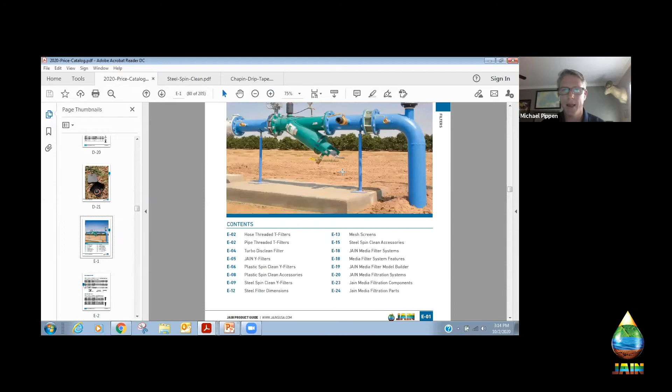So maybe I know what I want to look for, so I'll scroll down a little bit. Or maybe I don't, and I'm just going to jump to a section here. I can jump to media filters, I can scroll from there. Or maybe I want to go to the steel filter, so you can scroll to there.

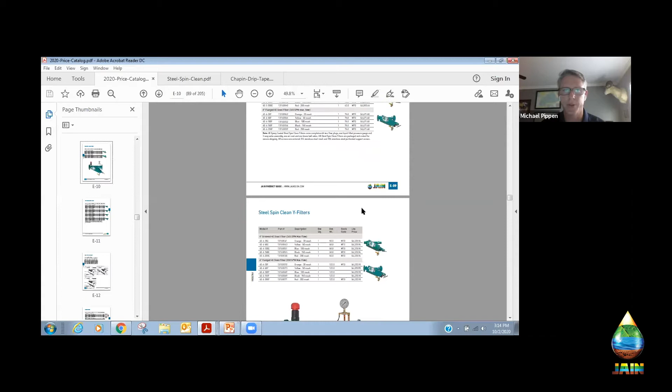The reason I like this bookmark feature is that you kind of get lost in a big catalog, right? The scrolling - where am I at? Am I at the front part of the filters or the back part of filters? With a page thumbnail, all you ever have to do to kind of get back to zero is scroll all the way up, click back on the table of contents.

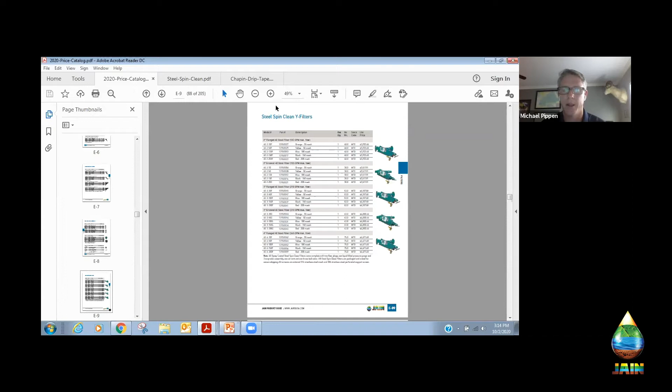You go, okay, I was in media filters, I really wanted to go to steel filters - I click right there, and that's how I get there. So instead of this endless scroll up, scroll back, you just really easily go back, bring you back down to zero, back to ground level, back to the table of contents, and move through the catalog very quickly that way. So that's a unique feature - you can move to the individual pieces of the catalog products, the product group, and then back and forth throughout the catalog.

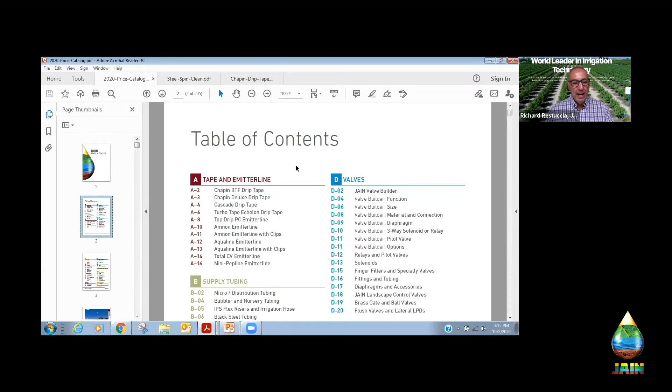Yeah, that's so valuable. I've spent so much time on other people's documents, turning pages, clicking the button, listening to the page turn - it's driven me crazy, right? So this solves it. And if I want to look at an emitter line, I can look at that. I can go back, go to fittings, whatever. Right, and everybody kind of has their level of expertise, or what kind of software.

Really, a lot when it comes to PDF - do you have the full version or the free version? There are some different features you may be able to add with different versions of a PDF editor, but this is basic. This is what you get for free, so there's no tools here that you're not going to get. If you're wondering does my software do that - yes, this is right out of the box. There's nothing special here you have to have.

And so as you start figuring out what sections you want to look at and what content is in those sections, I believe a lot of people may understand - let's say we're working with an ag dealer, or maybe even an end user, and they say, I know I need a drip tape, maybe I even know I want a certain flow rate or a certain spacing. But what does Jain offer, right? What is actually out there, and can I even specify what I'd actually want to do?

As a designer, you can design something that there's no product that actually would solve that solution. So as you become more familiar with what products are offered as a designer, that's really, really valuable—knowing how to design towards a solution that's available in the market today.

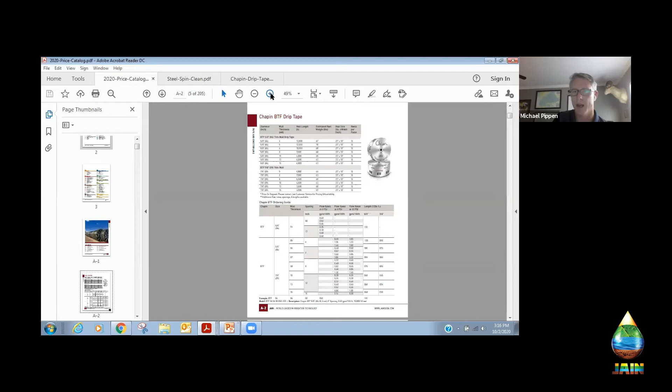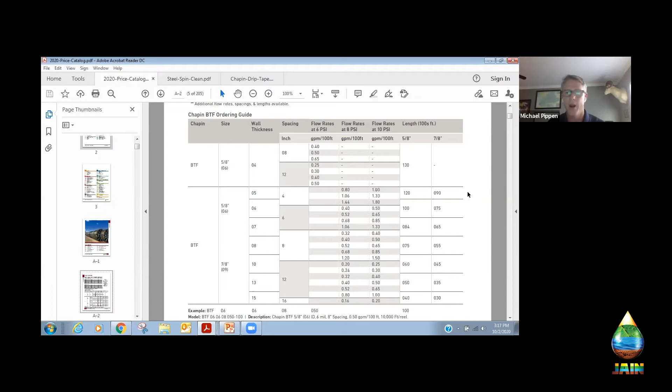So let's say, for example, we want to jump into our Chapin product. I can click right on this and it brings me directly to the BTF product line, the Chapin Drip Tape BTF. So what is available from us? It has some specifications here, but really where we put a lot of time and effort in this catalog is in product selection, because there are a lot of options out there. It's not necessarily a bad thing, but how do you get through a catalog this big with this many product offerings and get to the selection you wanted?

You'll see this format here that we're going to present throughout the catalog. It's very intentional that our selection guides are very similar in the way they're done, so you only have to learn one way to do this. You'll see some variation depending on the product line, but a similar flow across the chart, left to right.

So you're asking, okay, what does Jain offer here? They offer a BTF Chapin in a 5/8 or 7/8 product line. In that 5/8 or 7/8, we have these different wall thicknesses: 5, 6, 7, 8, 10, 13, 15. Within those wall thicknesses, we have these current spacings: 4, 6, 8, 12, and 16. And within those spacings, we have these flow rates, listed at both 10 PSI and 8 PSI—whichever one you like to work with. Some manufacturers use 8, some use 10; we have them both in here for that exact reason.

And then you get coil lengths based on the size—the 5/8 and 7/8 product do have different coil lengths. So for example, if you knew you needed a 5/8, 8 mil product, and you're kind of bouncing around your flow rates—maybe 8, maybe 12—what am I looking at? You can go, okay, in 5/8, 8 mil, 8 and 12 inch, here are my options. If I want a 0.40, I've got an 8-inch 40, I've got a 12-inch 40. You might even look up here and say, oh, do I have a 6? No, I don't have a 6-inch 40—I only have a 50 here.

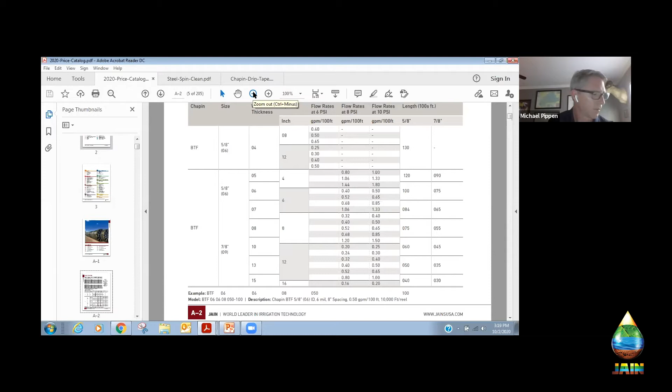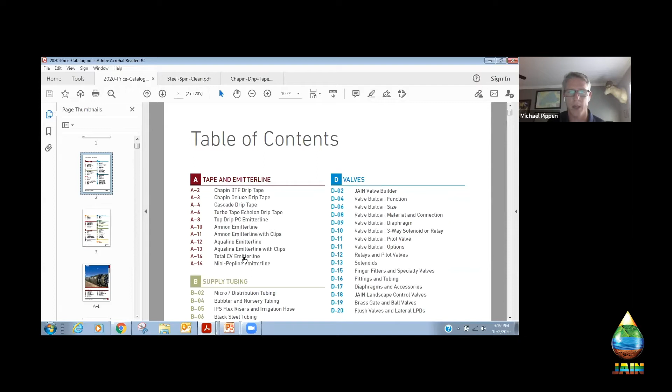As we go down, I'm going to go back to the base level and look at some of these other tape options and emitter line options. What do we offer in terms of the emitter line? Here's a top drip emitter line: Amnon, Aqualine, Total CV, Mini-Pepline. So, wow, there's a lot of emitter line options—let's just start at the top. You'll see with some of these, like top drip, there are fewer options—we're only offering 4 different sizes here, with some wall thicknesses, flow rates, and spacings. This is a lot less complex because this product line just doesn't have as many options as Chapin, which is probably one of our broadest product offerings in a drip emitter tape or tubing.

But one thing I do like about this catalog, which again is intentional—you'll see it throughout—is that it's telling us, well, what do you like to do, Jain? What is your preference?

If I don't know, or maybe I don't care, but what wall thickness? I don't know what wall thickness. What one do you have in stock?

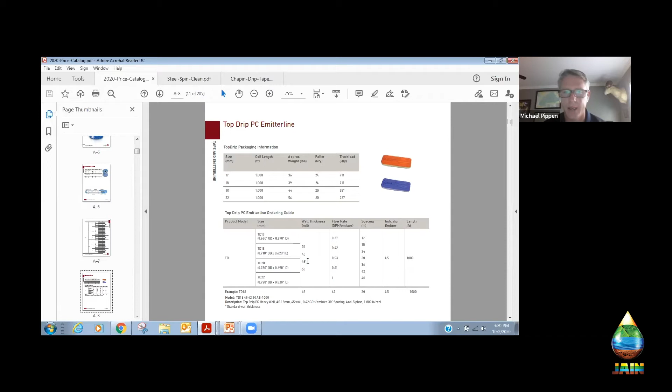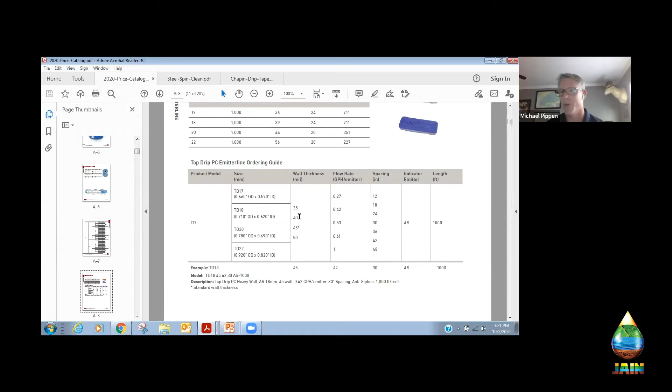Well, we have these indicators throughout a lot of these selection guides for what our standard is. Let me zoom in so you can see it better. It's got the little asterisk here that says this is our standard. So for some of the more obscure specifications you may not be familiar with, we say this is the one you really want. If you don't want this one, we can talk about other options. We do a lot of these, but this is what you'd want if you didn't specify it. We're going to give you a 45 wall thickness.

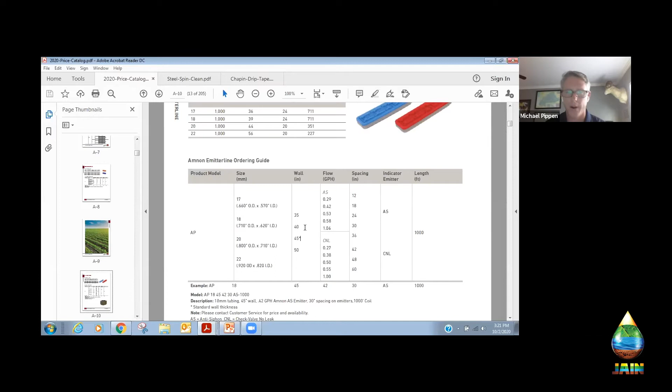If you go through some of the other options, a few more select, this is a little broader. It's got a few more options than the top drip does. Still a similar product, and you've got the sizes. Again, here it is, 45 wall thickness. That's the one we use, the one we use the most. There are other options, and if you have questions, we can answer those. But we give you these standards to help with questions you may not be as familiar with.

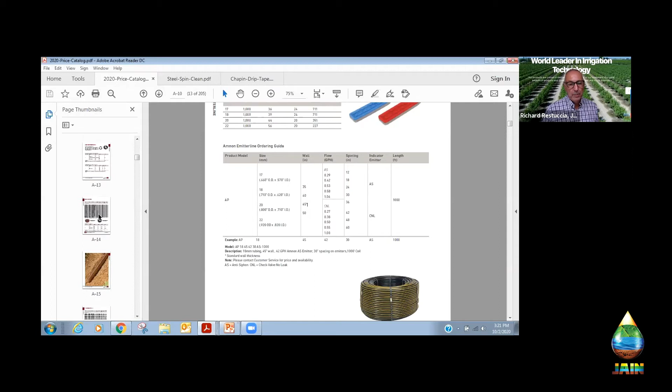Yeah, that's really great, especially the recommendation. And I also love the example of how to order it, because I don't want to make a mistake in ordering when I'm not familiar with one particular product, and having the model and description already laid out makes it so easy.

That's right. And again, some of these product lines are pretty intense, especially if you're familiar with the industry, and we can get kind of down in the weeds sometimes with all the options we offer.

I'd say the same thing about our micro tubing and round tubing or blank tubing product lines. If you look at this the first time, there's a lot of data on it. We'd call this a noisy slide if we were doing a presentation, but with all the content in there, I believe we've taken a lot of time and effort to use the product description to not just tell you what it is, but to help you on the technical side as well.

In our industry you'll hear a lot of sizes like 5/8, 16 millimeter, 18 millimeter, 20 millimeter, and you go, well what size 20 millimeter do you have? That in itself doesn't make a whole lot of sense. What size half-inch tubing do you have over there? Well, I have a 5/8 half-inch tubing, right? We do that in the South. It's like asking what kind of Coke do you want, and the answer is I want a Dr. Pepper. That's not the greatest way to describe these things, with nominal dimensions.

So at Jain we've taken the time - and it's a little painful for the sales guys to learn this - but we've done this long enough that a lot of our customers and most of our dealers order things by outside diameter and inside diameter. And then there's the coil length, part number, all the specs, everything you need. So our ordering number is the outside diameter by inside diameter, not 16 millimeter - in this case, 8 millimeter.

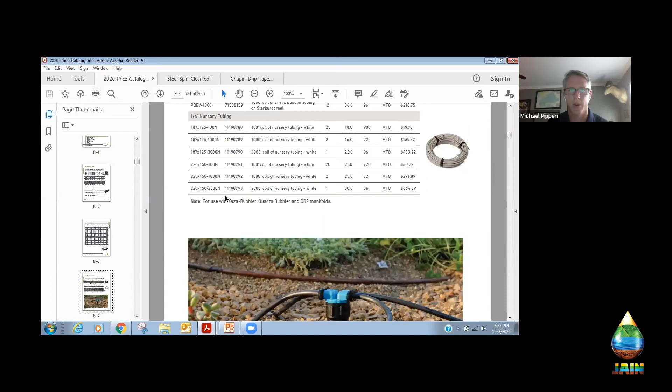If you get down to the round tubing, let's get outside of... I'm doing my scrolling thing I said I wasn't going to do, Richard. I know, you even said you were going to put a piece of tape on your scroll feature. Yeah, so I didn't scroll.

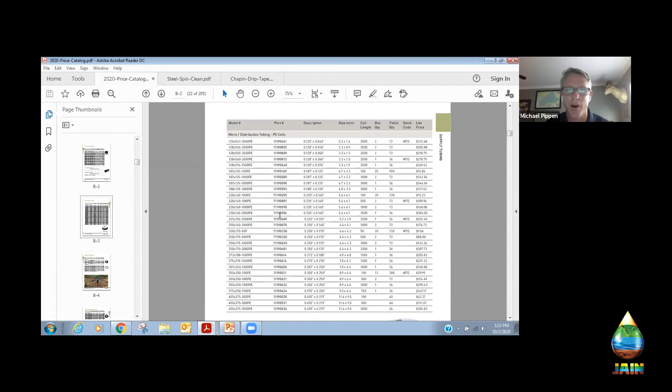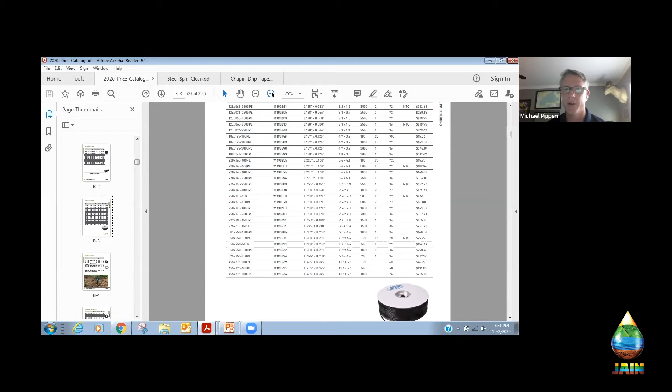But you start looking at some of the larger tubing here, like a 3/8 tubing. We're offering this in a 450 by 375 or a 375 by 250. These are all different products for different applications. But if you were just to order a 3/8 tubing, a 5/8, or a half-inch, you can obviously see there's some problems with how to get the correct thing ordered.

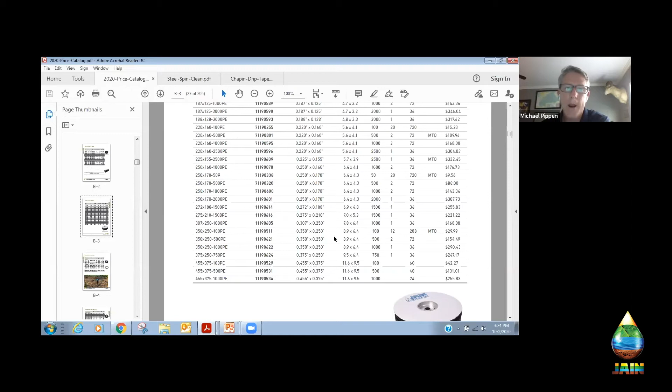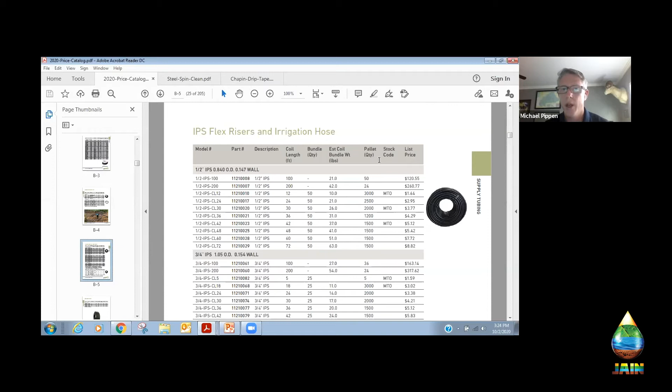As we're moving through this tubing product line, one that's a little bit unique is this Flex PVC Riser. A lot of people, when they first see it, call it a rubber hose. But it's really like a riser, a gluable PVC product that's flexible and used kind of like in a riser application. You'll see that when we get down to our fitting section where this product fits in.

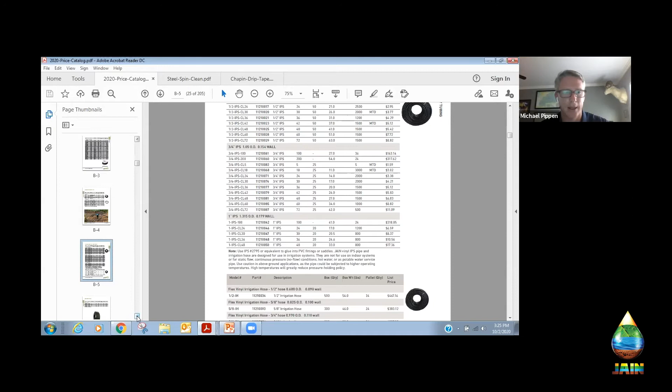It's a unique riser product with a lot of different applications, a little bit rigid, almost like a swing pipe for the ag world. Not everybody offers this. We offer a lot of these specifications in rolls, cut lengths, and even some in-between sizes to work in the SDI market. It's real popular, but probably not going to get its own webinar as a product specification.

This is the real slide I was looking for when you start talking about which one of these to use. Look at all these versions of 1/2 inch we have - that's a lot of different sizes all called 1/2 inch. So intentionally we use this OD/ID description, so we order it correctly and use the description as a technical platform as well.

When I first saw this chart, it was really overwhelming. Then I realized some of it is the OD/ID situation, but really most of it occurs because for every different length, we have to have a different part number. So 50, 100, 500, 1000 - that's the same product, but with 5 different part numbers because there are 5 different lengths you can buy it in.

I think one thing we do at Jain is really offer a broad line because we're global, and here in the USA we go coast to coast. What works for the West Coast doesn't always work for the East or the Central, and also landscape versus ag differs. So there's definitely some items here that are in our wheelhouse - what we do every day - and we notify that as well as noting MTO, made to order items that we're probably not going to have a tremendous amount of stock of. But if you zoom back out, you really don't start getting to these made-to-orders until you get to the large diameters, some custom inside/outside diameters. They all have a great application, but aren't really our bread and butter.

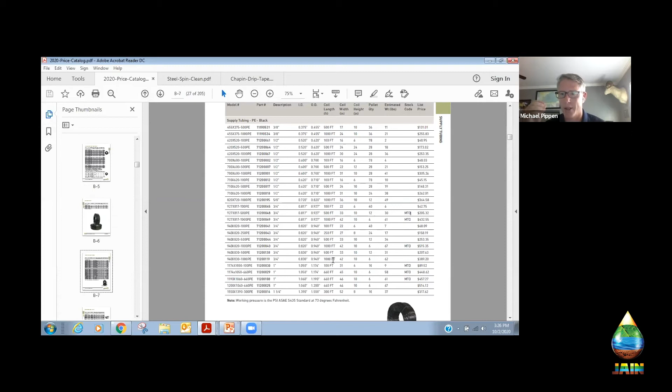So we do try to simplify it down, kind of like the little asterisk - this is what we normally buy.

One other category that I really like how we presented it is our fittings. I believe our fitting category is one of our strongest. We have a great brand name on our Power-Loc and Tape-Loc fittings. You'd think that's not an overly technical product line, but I believe it can be. The whole idea of the Power-Loc is that it takes some of that specification problem out of the way, but we offer several different product lines within the fitting category.

This is one of the most important pages in the catalog. It shows how to take Power-Loc SKUs - 6 SKUs here - and basically work with any kind of round or emitter line tubing in the market that's not way outside the normal. I don't have the real statistics, but I'd suggest you could take these 6 fittings and work with well over 90% of the tubing, whether emitter line or whatever, that's in the irrigation industry today.

Very powerful tool. Going back to my distribution days, we got a lot of questions about fittings. It's interesting - people don't really want to call about a fittings question because they're a little ashamed. But if you've got one of these fittings and never seen it before, what do you do with it and how does it work? This diagram shows how to put the tubing on, then spin the nut over the tubing and lock it in place, rather than taking the nut off, putting the tubing on, and trying to tie the nut on top like a ferrule fitting.

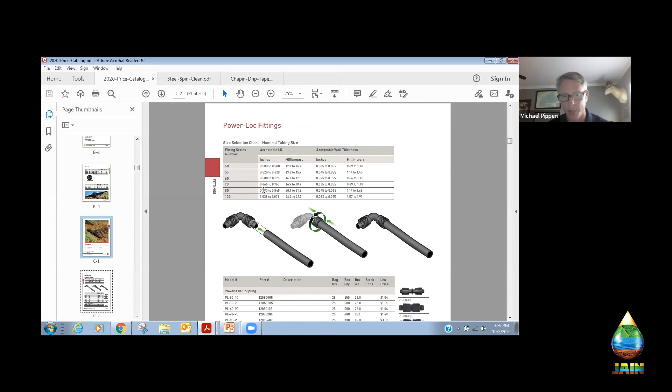Right above it, you have the specifications it works in. So you could take this right here realistically and go to work. Elbow, coupler, those type of things are a little more universal, but you'd have to know - Power-Loc 60, here's how you use them, here's how you specify it. You're really off to the races right here.

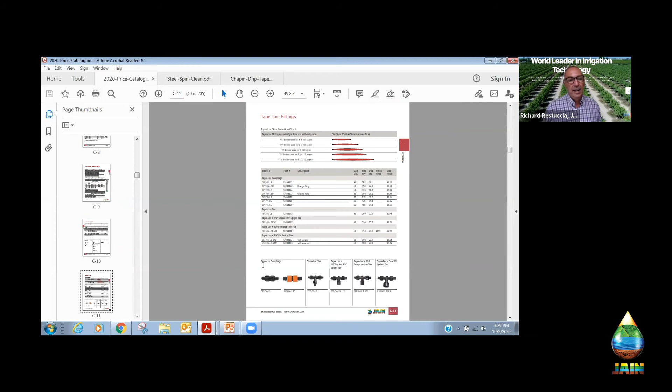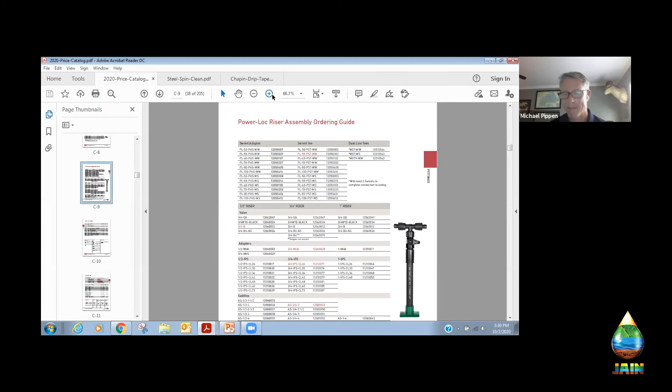Yeah, I love the Power-Locs. We also have a video showing how to put those on, but once you got it, you got it. Especially in the landscape industry, you roll up on a job and you've got half-inch tubing out there - you don't have to figure out whose half-inch tubing it is. You've got your Power-Locs and it fits all the half-inch tubing. So we've really seen an increase in contractors using that because of the labor and time savings.

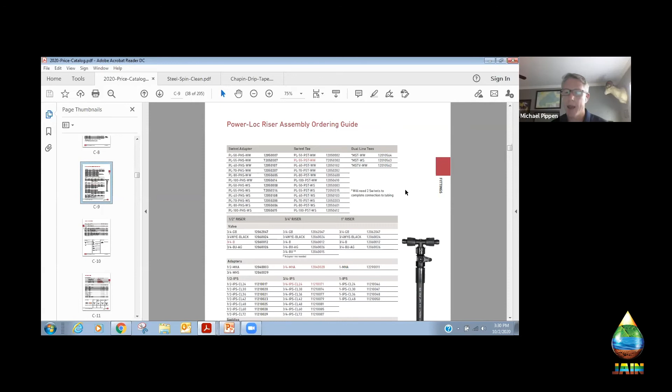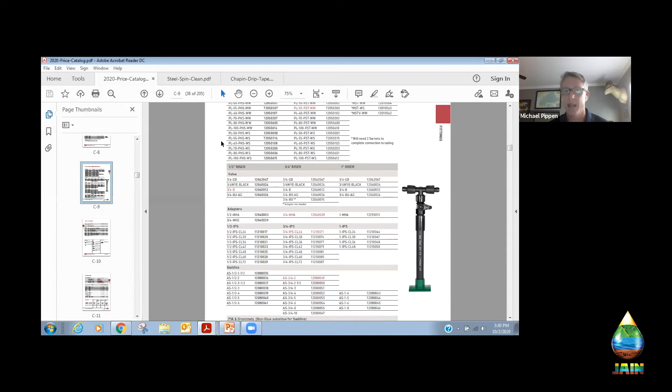Really briefly, before we get into a few other topics in this catalog - these are the riser fitting assemblies I was describing, where we can do things like this. Same type of ordering process where you've got this number code, and then you move across here. It's got a description of how to do it, and you can order these assemblies direct from us rather than doing it out in the field.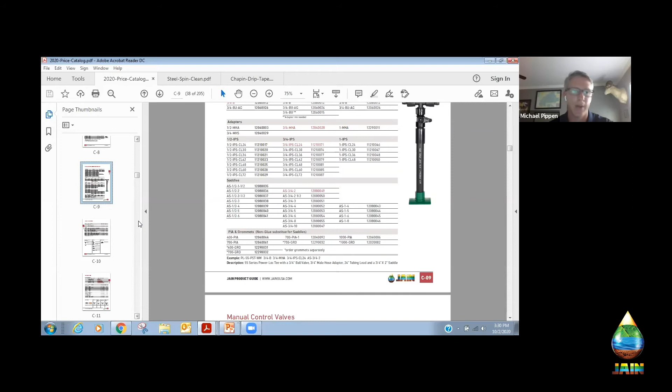Michael, kind of jumping around - who's using those riser assemblies? Who uses those for what?

A lot of our ag dealers use them if they've got a large project. It may not be a stock item for them, but let's say they're doing an almond field, or even SDI and cotton, and they've got a thousand of these things to build up. You got 10, not that big of a deal, but you got a thousand of them - besides just the cost and the labor of getting them all right, we have a way that we can cut those lengths almost identical every time. We can weld them up almost identical every time.

You get a finished product, you can take it out to the field - there's no worry about glue or conditions. A lot of times, is it hot? Is it cold? How's that glue going to work? So those are super popular in those kind of applications, where we can build those up in a controlled environment and take a few of the elements out of the gluing process.

Yeah, what a time saver, huh? That's right. So using some of my tools that I described, I wanted to jump to the valve, and I honestly didn't quite remember the fitting - the valves came right after the fitting, so I kind of went back to ground zero.

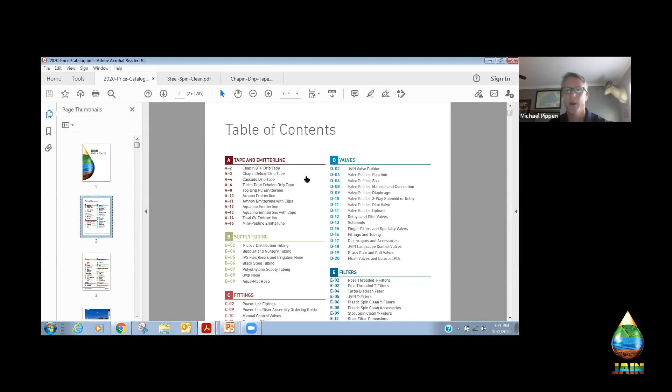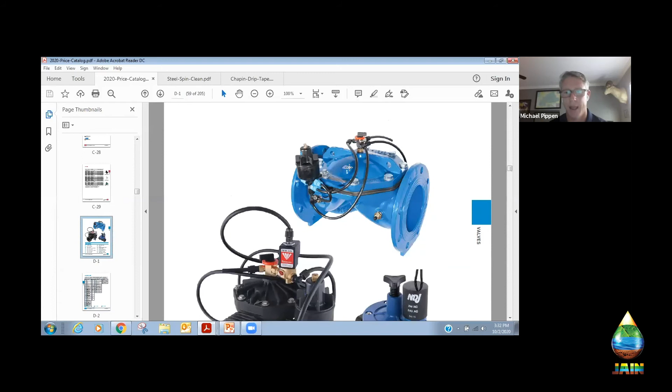I scrolled up in the page thumbnail, went to the table of contents, and I want to show you this valve builder here - this is a super powerful tool. Valves are very complex. To build a hydraulic valve, for those familiar with this product line, it can be complicated. Let me go one page up - look at this, right? It's got all kinds of stuff hanging off of it, different sizes, different components.

This is a metal one, this is a plastic or PVC, this is the smaller globe, more like a landscape valve, right? All these tubes and brass connectors. What in the world's going on here, right?

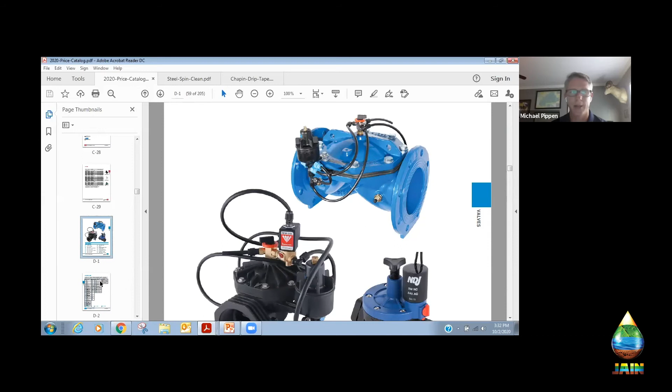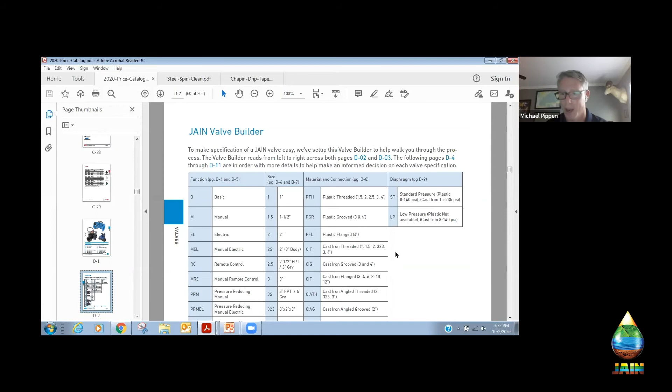So we've taken a lot of time trying to help you describe that valve in as few words as you possibly can. In this valve builder, you've got the functionality on this side, the size, material, and some of the diaphragm on this first page. That really tells us the majority of what we need to know for that valve.

We're going to buy a pressure reducing manual electric valve, PRMEL. We want to buy a 3-inch, so 3, and we want it to be cast iron flange, CIF, and we're going to use the standard diaphragm.

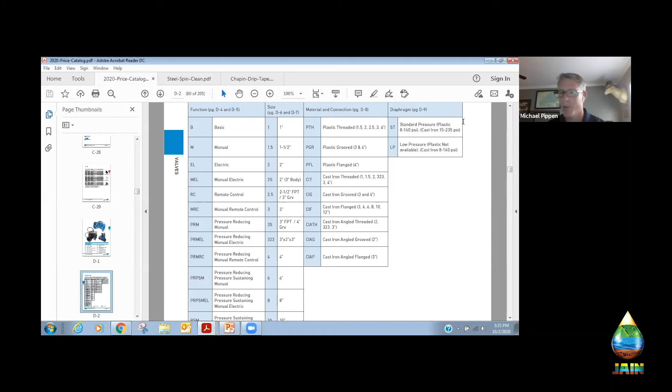There are some things that, if you're writing your catalog, I'd write right here and put an asterisk and say we use the standard diaphragm almost all the time, right? That'd be something you'd want to put in your permanent notes, but knowing that there is another option there.

When you get to the next section, you talk about solenoids. Depending on which valve you select, you may do a 24-volt normally open solenoid. If you've got a small valve, you use S1. If you've got a large valve, you use L1. If you go into the pilot, like in a pressure reducing from 1 to 6-inch valves, we use the plastic pilot. So you've got your pressure ranges here, right? And then you got all these options you can put on the end.

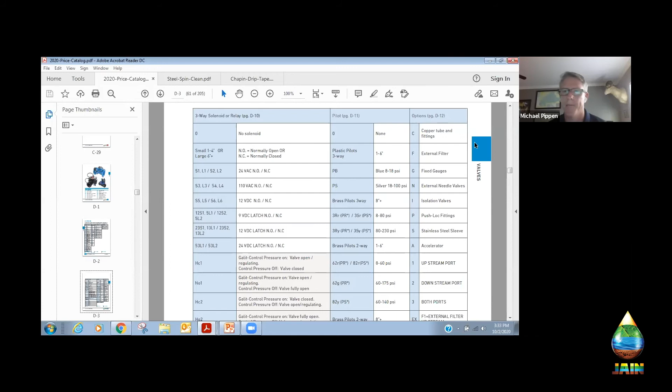So there is a lot. A chart like this is going to take some practice, and that's okay. That's what we're here for at Jain. We have technical people on the inside. I got a little tutorial today from our valve product manager, making sure that I understood everything. But I will say that with a little bit of practice, you can move through it pretty quickly.

Some of the other features here. These photos are pretty amazing, and I believe Michael took almost every one of these photos as well. It's pretty nice to be able to see the product so clearly.

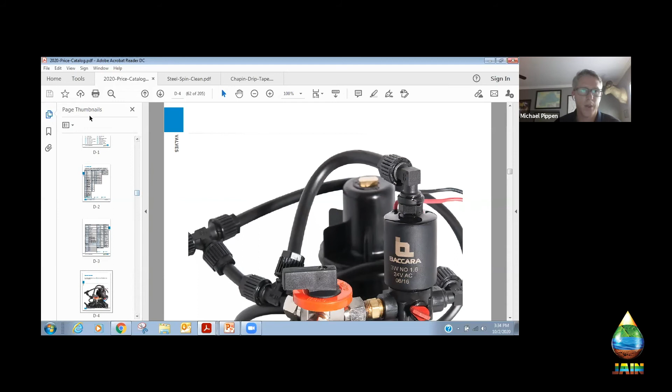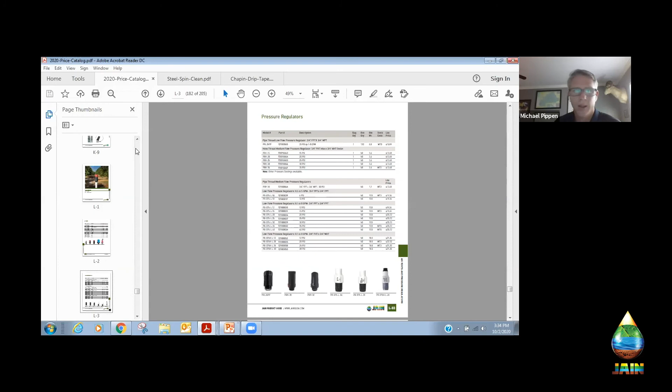Yeah, that's an important part of the catalog, figuring out what product you want is how to place these things. If you take a product, one I'd show is maybe some of the more obscure items in the catalog, like an air vent or something along those lines. What do you use with an air vent? Well, a lot of time was taken to take the picture of an air vent where it's supposed to be, right? So now you're like, oh, well, that's what I do with an air vent, right?

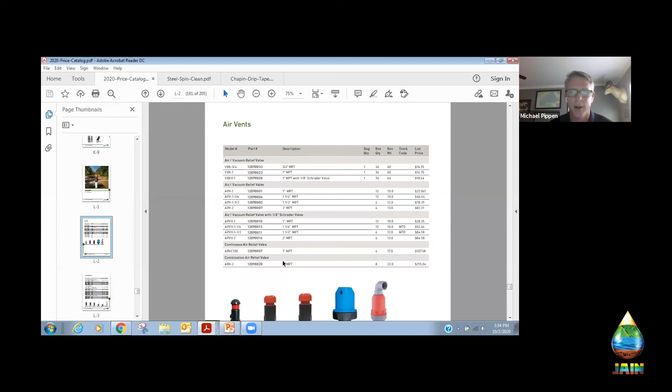And those are subtle details, but they really help when you're trying to learn how to use things, if you haven't been in the industry forever. Like, what do I do with an air vent? Well, that's how it's installed, right? And then, oh, well, there's a whole bunch of pictures of different ones and what they do. Here's a neat one, right? What do I use that staple thing for? Why is that in the catalog? You can look at this and go, it holds the tubing down. Isn't that neat, right? So a lot of intentionality put in the content, and also the clarity. I mean, having a picture that is this good, I don't understand or know how they do it, but it is phenomenal in the way that they get these pictures in here.

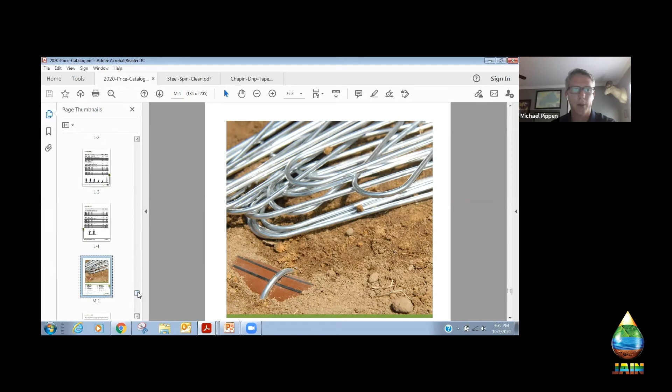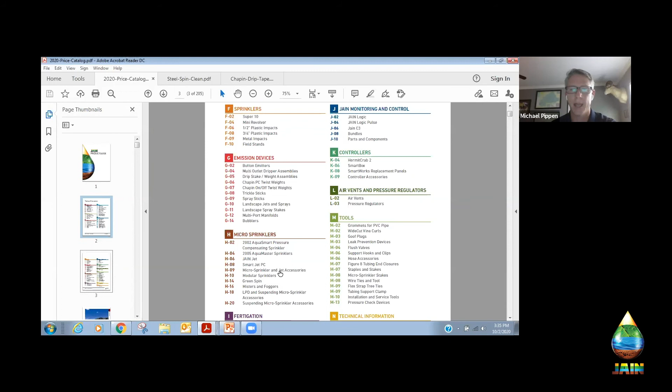If you can bear with me one quick second, Richard, I want to show one more example of the product selection guide here that's a little bit different in our micro sprinkler section. It looks a little bit different than the tape and emitter line, a little bit different than the valve section. But you'll see this kind of format for almost all of our sprinklers, where you've got this series 161, with all these different options with the swivels, flow rates, all these types of things.

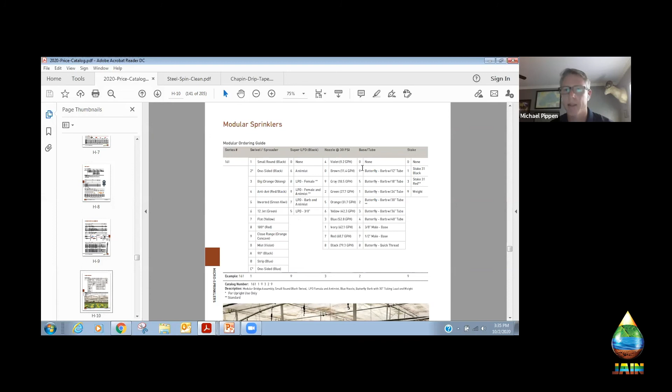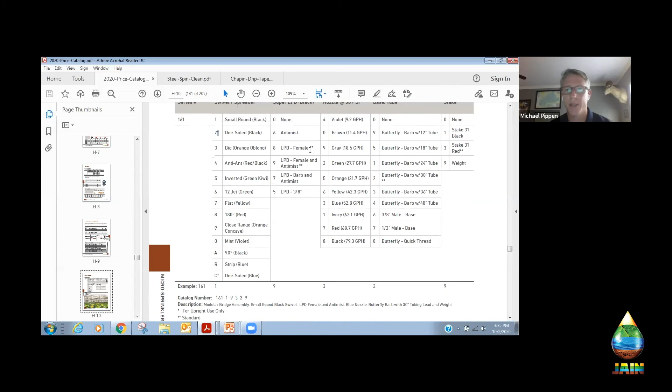But you'll notice, again, the asterisks, right? Like, whoa, well, there's a lot of options here. What do you normally do, right? So we've got some ways to kind of steer you and point you in the right direction of what we normally do. And then we do our best to write underneath that, or in that same section, maybe on the page before, but mostly on the page after, where you've got the technical detail of figuring out, oh, well, I want green with green, and these spinners don't even work.

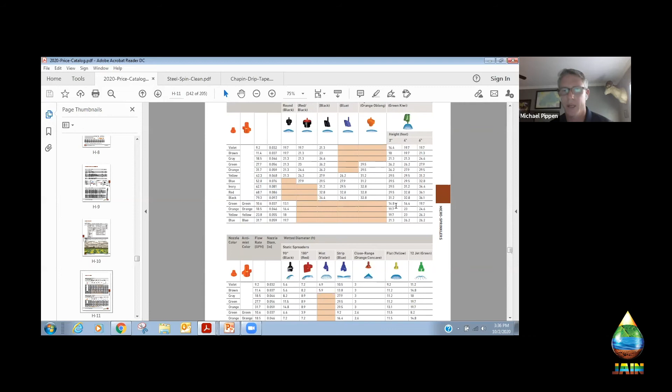Here's the green kiwi, that's the one I want. Without jumping all over the place, if you're a scroller you can just scroll right back up, or if you're in your paper catalog, imagine they're across the page from each other. Some of the organization, you'll wonder why is there a picture right there? Well, there are pictures to make these selection guides and technical information fit in the right frame of vision, not three pages down the road.

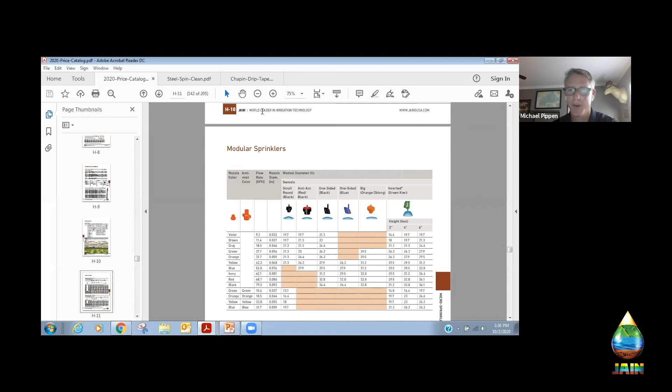I thought it was nice too, because you even see on some of the illustrations the spray patterns and what you expect from that. Certain people have very specific requirements there. What does that thing actually do? Well, that's what the water looks like coming out of it. These look pretty flat, and that one kind of curves down, right? That takes some time to get familiar with, but if you're not familiar with the product line, you can look at that and make some really good judgments.

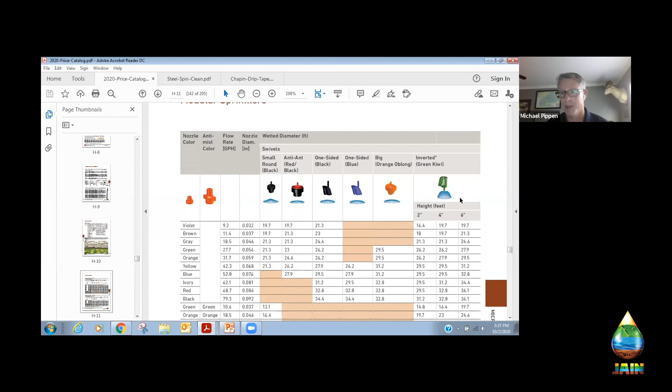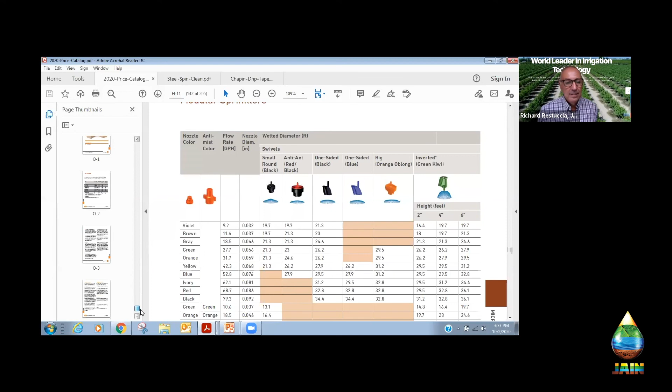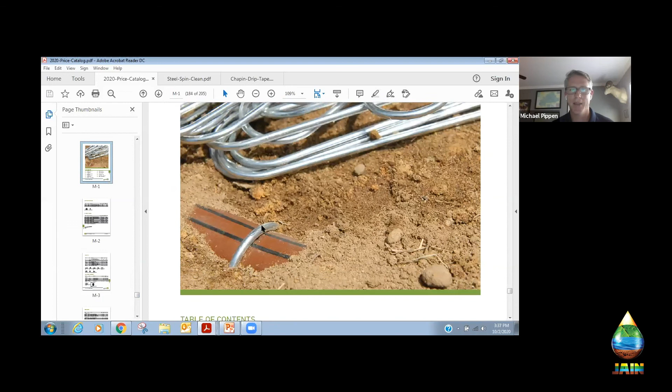All right Mike, we've got a couple more minutes, that's kind of where we're at. Yeah, if anybody had any questions we wanted to dive in, there's all kinds of stuff here. I'd say one of the funnest, more obscure parts of the catalog is our tools and accessories. We have a very broad range of tools and accessories that run the gamut from little fittings to do specific things, to wire ties, staples, figure eights, and all kinds of stuff that helps tie the system together. It's important to be able to purchase at one location, and I think that's worth some time.

Here's another nice picture of something maybe not your most common product, like a flush valve, and how you use that installed in the right application. So the tools section is one I'm fond of, because it really helps a dealer, distributor, or end user select all the products and not go hunting around to get the products to actually tie the system together.

So that's kind of what I have for the presentation today, unless somebody has specific questions we want to look at in more detail. Yeah, a couple things. One, I do love this photo in particular, because everybody should have flush valves on their system. They typically don't in landscape, and then we show them in this photo exactly how it should be installed and used, and that photo is worth a thousand words, so that's great.

One of the things, Michael, I think we got a question here. People are a little overwhelmed, right? It's a couple hundred-page catalog, over 200 pages. If I'm really looking at it for the first time, or I'm going to look at it differently after this session than I did before, as a first-time user, what would you say they should do? How should they go through the catalog?

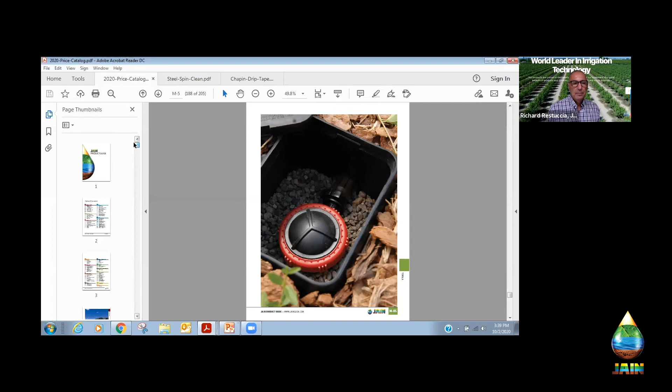Well, I guess I'd make the assumption that you're at least interested or have some background in irrigation, right? And so I would challenge you to start where you're comfortable. That will help you learn the layout of the catalog. So let's say you worked at a dealer that did a lot in the greenhouse section, and you worked with a lot of different types of filters. You could go to this section and start getting the idea of how it plays together, how this is presented, and I think that would be helpful as you look into other sections.

And then, honestly, like most things, it's taking a little bit of time and scrolling through it and seeing if you can figure out the product selection guides. I think that's a great tool to figure out what does this thing do, how does it do it. Again, all these things have extra resources to them.

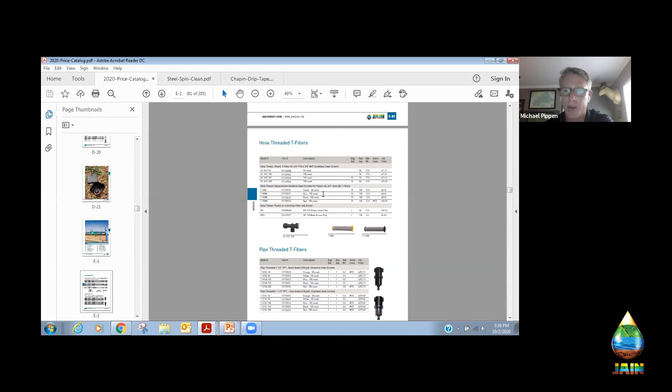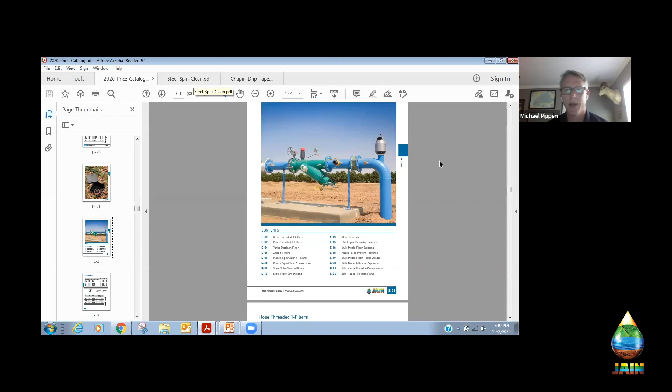So if you look at this blue filter page here, I've got the spin clean. Let's say you're looking for a spin clean filter and you're like, I don't know, this is a lot of stuff in here. Back where we showed you in the resource guide, you go again, filters, blue, spin clean. Does that picture look familiar?

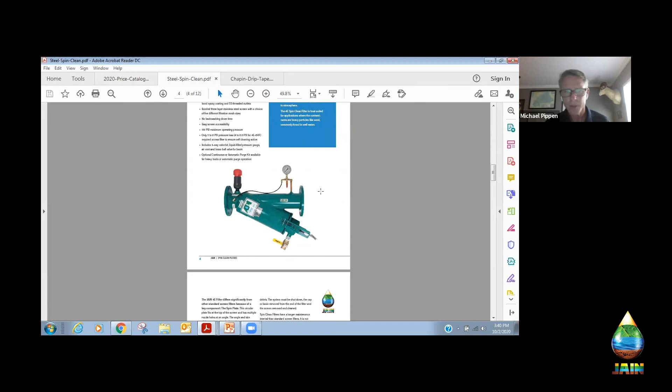Looks familiar, right? The color there is intentional. So you're not going, am I in the spin clean section? Of course you are, because the picture, the color, and everything's the same. And you can kind of get into some more detail. Almost all of these product categories have extra resources available on the website, like where we showed you under the technical guide. So if you go to Ag Product Catalog, technical brochures is where you'd find all this stuff, and you can download them or view them live. There's our air vent picture, right? So again, a lot of redundancy to help you not be like, where's the air vents? Where's the screen filters, right? Oh, that picture, I remember that. I've seen that. And so I think that that's the way I do it. Start where you're familiar. If there's something you're not familiar with, see if you can find an additional resource for it. Most of the time, they're going to be there.

Yeah, so that's great. And you just answered the next question too, and that was, what is all this color coding about? Certainly it is to keep you consistent in the product category. Yeah, I find it super helpful. I really do. I don't know that I put a whole lot of thought into it previously. But you'll see the color tabs in all your binders and things like that. When you start talking about different marketing resources built for different purposes, like a catalog versus a cut sheet versus maybe a sales sheet, having that uniform flow where you can just go grab that and recognize it, and not have to say, is this the thing I was looking at in the catalog? It really is a pretty valuable tool.

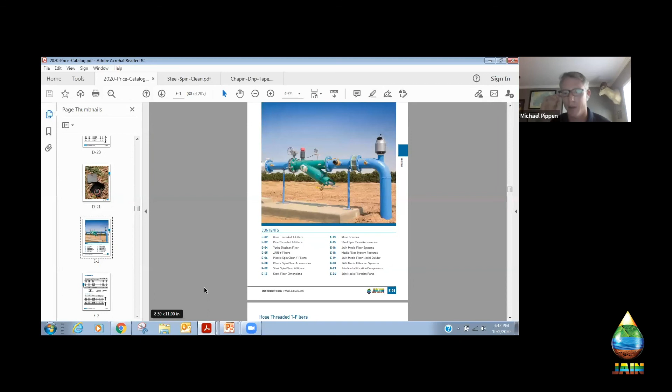Yeah, and then we did have another listener make a comment, not a question, but a comment. They were saying with the app, the product guide or the technical brochures library in that app, you can access the information without even being online. So you can download the stuff to your phone or your iPad or your computer and have it. And if you don't have a good connection, you can still access the information. They wanted to make that point, which I think is a great point. Yeah, you're right, especially with a catalog that's pretty big, right? You might not have every resource downloaded on your phone because of space, I get that. You never have enough space on your phone, right? No matter how many gigs they hold. But having that catalog to where you can pull it up when you're in a rural area is super important to me. So I have that one downloaded. I have my filter one downloaded. I have my valve one downloaded. The ones I go to frequently, I already have those on hand, so I don't have to have a cell signal to do that.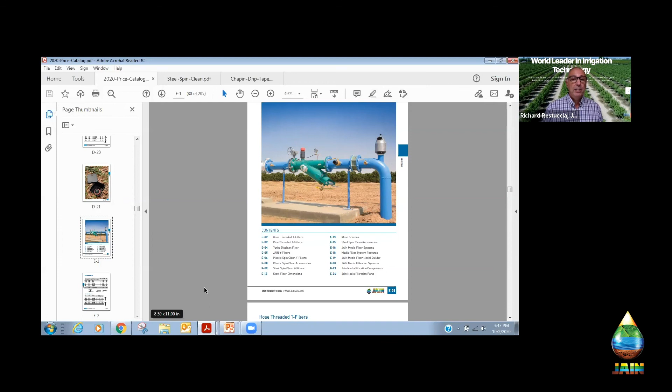Yeah, and then the other thing I just want to mention is, we talked about the marketing team participating with the catalog and Michael Derwenko, of course, but man, this was a combined effort from our product managers to our salespeople. Everybody, customer service, everybody pitched in and helped with this catalog. And I think they did a fantastic job. I really appreciate it. Michael, of course, you did a great job in showing this.